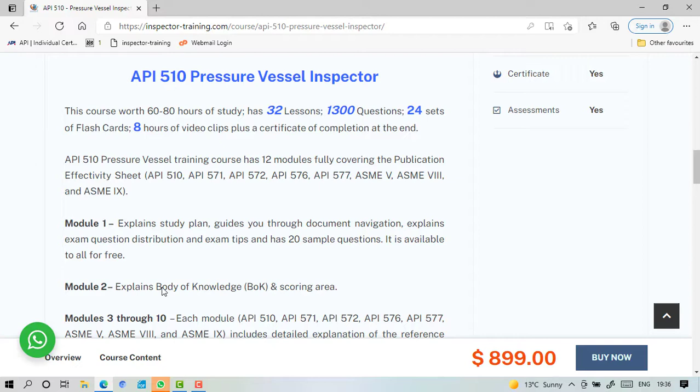In Module 1, we'll explain the study plan. We guide you through document navigation, explain exam question distribution and exam tips, and the 20 sample questions that we'll be talking about very shortly. And it's available to all for free. In Module 2, we explain the body of knowledge and scoring area, and then Modules 3 through 10, each module is dedicated to one of the reference documents, as you can see.

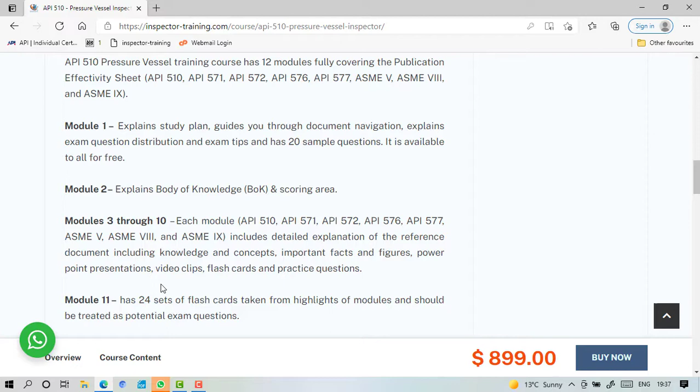And this includes detailed explanation of the reference documents, including knowledge and concepts, important facts and figures, PowerPoint presentations, video clips, flashcards, and practice questions. And then in Module 11, we brought all the 24 sets of flashcards that actually are highlights of the module and should be treated as potential exam questions. And in Module 12, we have 5 sets of closed and open book mock exams with over 500 questions.

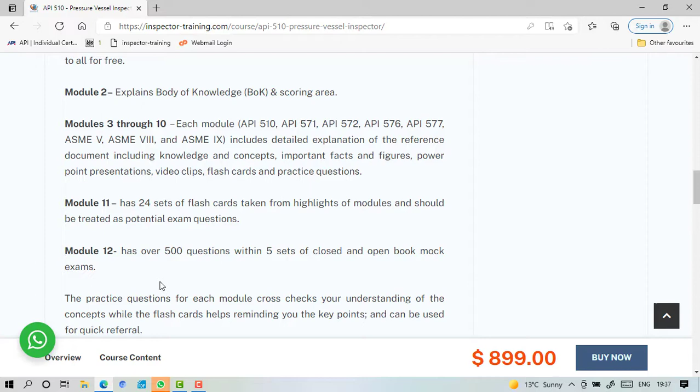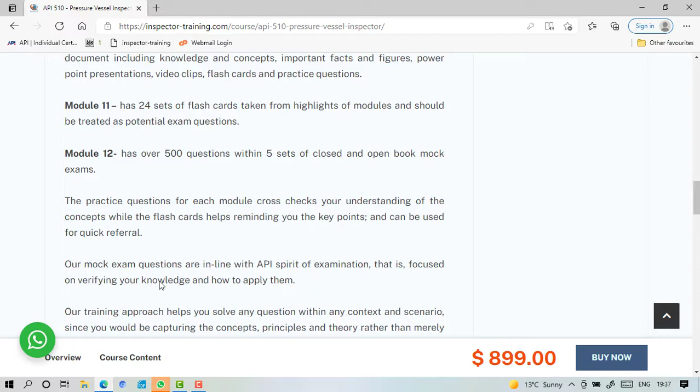The practice questions for each module cross-check your understanding of the concepts, while the flashcards help remind you of the key points and can be used for quick referral. Our mock exam questions are in line with the API spirit of examination, and are focused on verifying your knowledge and how to apply it. Our training approach helps you solve any question within any context and scenario, since you would be capturing the concepts, principles, and theory rather than merely memorizing some numbers or facts without understanding the underlying reason or their applications.

The depth each topic or module covers is based on the expected number of exam questions. This would help you spend your study time more effectively and be more focused, concentrating on high score exam topics. The exception, as we said, is made for API 571, the corrosion materials part of the exam, where many candidates face difficulties. A comprehensive set with ample practice questions and flashcards is exclusively designed for the API 510 pressure vessel inspector examination.

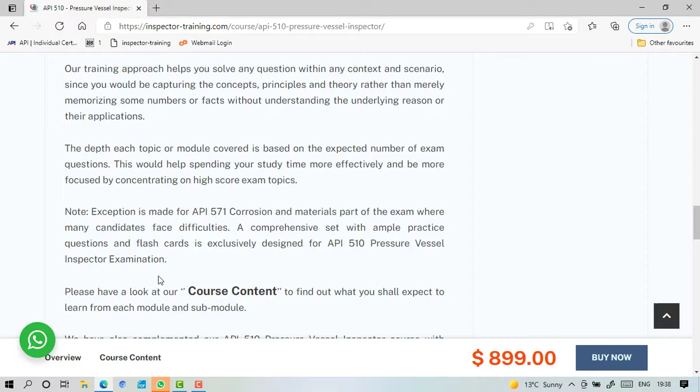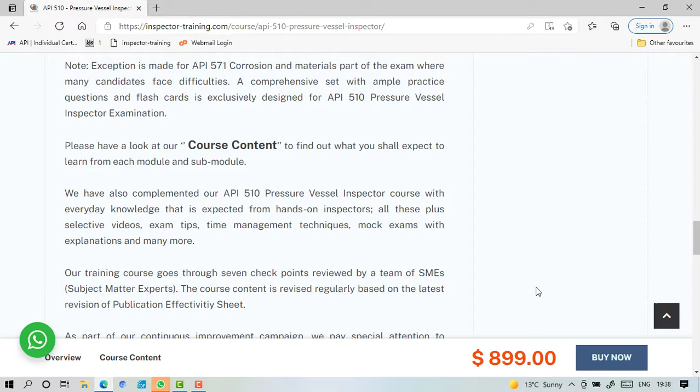Please look at our course content as we have explained, so you know what you shall learn from each module and submodule. We have also complemented our API 510 pressure vessel inspector course with everyday knowledge that's expected from hands-on inspectors. All these plus selective videos, exam tips, time management techniques, mock exams with explanations, and many more.

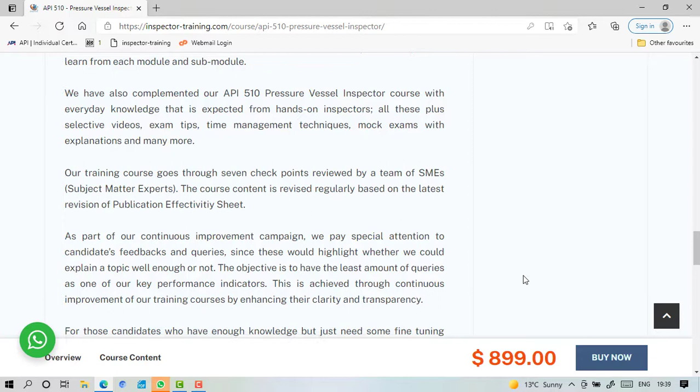Our training course goes through 7 checkpoints reviewed by a team of SMEs, subject matter experts. The course content is revised regularly based on the latest revision of the publication effectivity sheet. As part of our continuous improvement campaign, we pay special attention to candidates' feedback and queries, since these would highlight whether we could explain a topic well enough or not. The objective is to have the least amount of queries as one of our key performance indicators. This is achieved through continuous improvement of our training courses by enhancing their clarity and transparency.

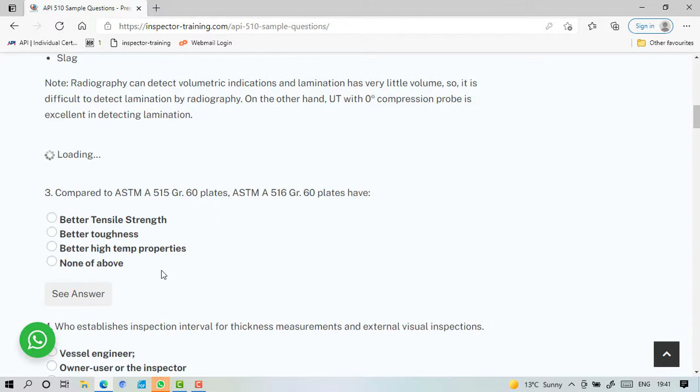Question 2, API 510 shall not be used as a substitute for original construction of the pressure vessel before it is placed in service, because that is the scope of API 510. So number 3, compared to ASTM A515 grade 60 plates, the 516 grade 60 plates have better toughness. They don't have better tensile strength because both of them are 60, showing their ultimate tensile strength.

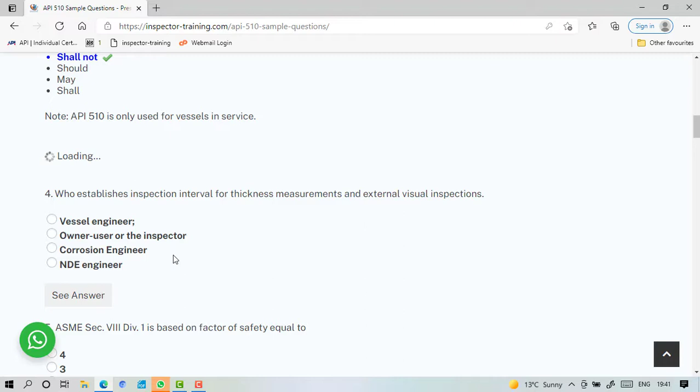Number 4, who establishes inspection interval for thickness measurement and external visual inspection? So it is owner or user or the inspector, because owner user is ultimately responsible and they normally assign an authorized inspector to do the job for them. Vessel engineer takes care of the design aspect of the pressure vessel. Corrosion engineer, as the name suggests, is a corrosion advisor, and NDE engineer would advise you about the NDE methods and the coverage, etc. So it's eventually the owner and the inspector.

5. ASME Section 8 Division 1 is based on the factor of safety equal to 3.5. Please remember that previously it was 4, and then because of better quality manufacturing over the years, the factor of safety was reduced to 3.5.

6. Identify incorrect statement from following, if any. A welder performance procedure test is also qualified in that position. That's true. Supplementary essential variables become essential variables when impact test is specified. Yes, that's true as well. And for procedure qualification, the test can be performed in any position, as the position is not essential variable for procedure qualification. Please remember that although position is not an essential variable for WPS, it's an essential variable for WPQ.

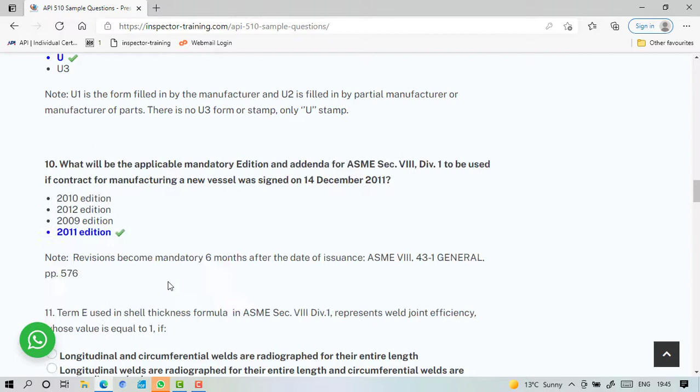Number 11, the term E used in shell thickness formula in ASME Section 8 Division 1 represents weld joint efficiency, whose value is equal to 1 if longitudinal and circumferential welds are radiographed, and actually it is the second one, longitudinal welds are fully radiographed while circumferential are spot radiographed, and you have to refer to UW-12, because the longitudinal welds have roughly twice the stress applied than on a circumferential joint, and hence it should be fully radiographed.

Number 12, restoration work by weld overlay was carried out on corroded wall of vessel, and it can now be used as per the design condition of the vessel. This activity will be termed as repair of the vessel. Remember, we have alteration and repair. There is no renewal or re-rating. If you re-rate, that's practically, it can turn into an alteration actually. So because it's the original condition, you're restoring it, then it's a repair.

Number 13, in certain MT check of pressure vessel, the size of indication for a certain discontinuity was seen as 4 mm, but after the MP check and using magnifying glass, it was seen having actual size as 2.5 mm only. If stipulated acceptance criteria for that type of discontinuity was 3 mm, your decision is, so I would select this, the size of indication is higher than 3 mm, reject.

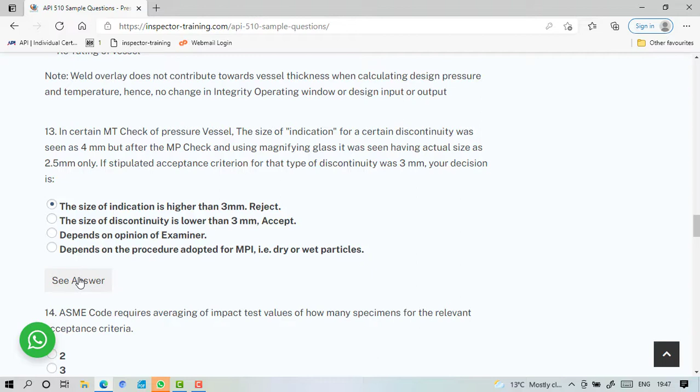Because although with more accurate measurement you got 2.5 mm, which is less than 3, if you accept this, then you have to do all the future and the previous MT checks once again. You have to check them once again, and it's always good to be on the more onerous side.

Number 14, ASME code requires averaging of impact test values for how many specimens for the relevant acceptance criteria. It's a straightforward 3. You need 3 samples for Charpy impact test.

Number 15, stainless steel weld has a crack open to the surface. Which NDT method will reveal it effectively? Liquid penetrant is the best. You can do radiography or UT as well, but if it's open to surface, it's always better to have liquid penetrant. And magnetic particle you can't do because it's stainless steel.

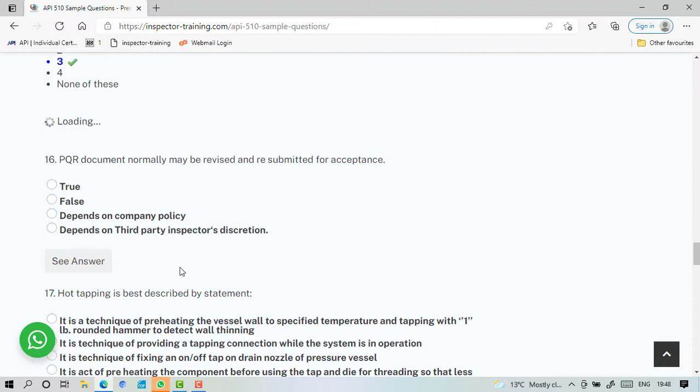Number 17, hot tapping is best described by the statement: it's a technique of providing a tapping connection while the system is in operation. This is a straightforward definition of hot tapping.

And number 18, which of the following represent grouping of weldment in ASME 9? So P number is for base metal, F number is for filler metal, and A number is for the weldment. And remember that weldment is a combination of weld and base metal, and there is no S number anyway.

Number 19, an inspector should be stricter while carrying out inspection on longitudinal joint because it undergoes twice the stress of a circumferential or any other joint. So you have to be more strict. And if you see the acceptance criteria, it's more onerous for longitudinal joint. And if you want to get a joint efficiency, for example, for a longitudinal joint, then it should be 100% radiograph, while for circumferential you only need spot radiography.

And number 20, PT examination is used to detect the surface cracks in welds as well as in base metal plates. For proper detection, we should allow higher penetrant time on weld. Actually, we should allow higher penetrant time on base metal or plates because they are smooth, and it takes more time for the penetrant to flow, whereas the weld surface is always distorted.

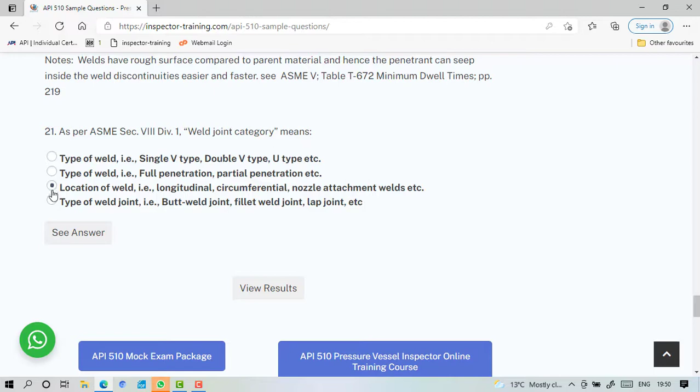And the last question, as per ASME Section 8, Division 1, weld joint category means location of the weld. Remember, go to UW-3 and UW-12, and you can see that the weld joint category is defined by where it's located.

Now, if you want to view the results, you simply need to put in your name and email address, and you can see the result. And you see that here we made one mistake, and if you go down, you can see where we made the mistake. Let's go through this.